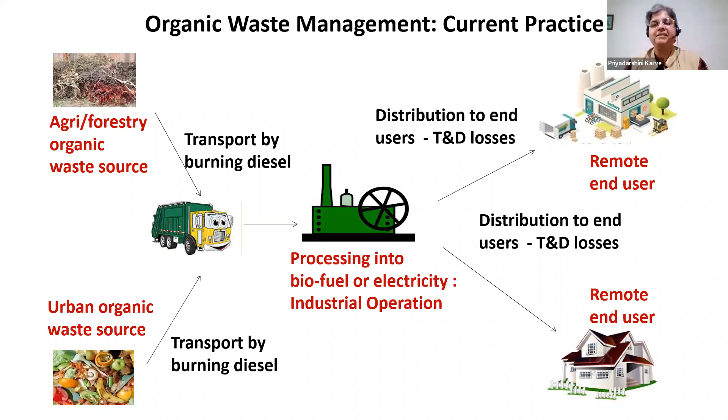So we have been promoting what we call micro scale or extremely decentralized processing, because even city level organic waste processing may be called decentralized, but what we are talking about is extremely decentralized as much as possible. Whatever organic waste is generated at a particular location, convert that into a usable or sellable product at that location itself, with minimum transportation of this material, which is a high volume, low weight kind of material. That is why a lot of energy gets spent for very little energy coming out.

The end users would also then be the community which is in a way generating this waste.

If these are the kind of systems that are set up, which could be at a single household level, an institutional level, or a gated community level, the maximum scale should be at a municipal ward level. Waste should not travel beyond that. If that logic is followed, you can actually get an output that is more than the input.

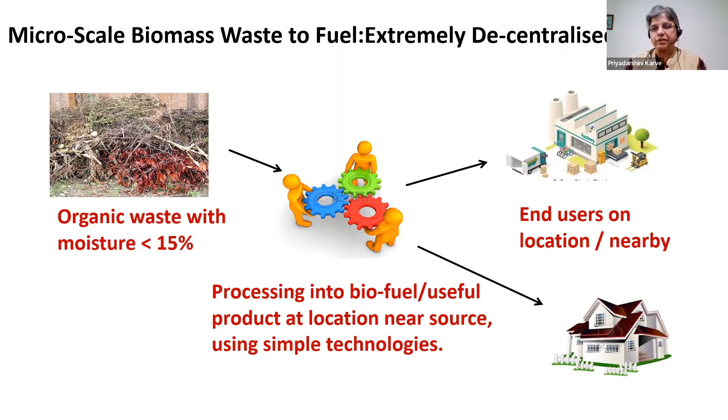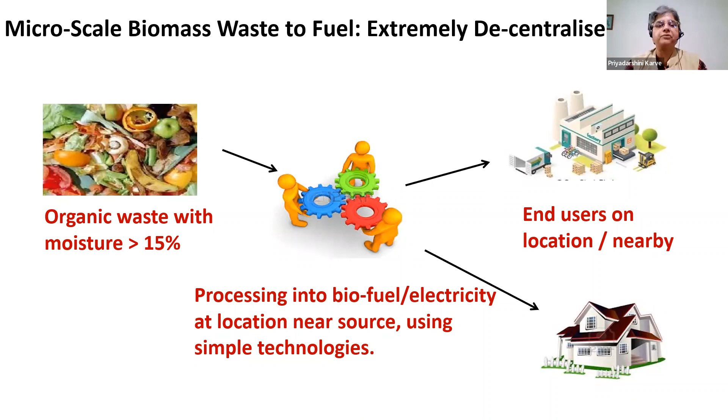Even organic waste has to be further classified, because different processes are used for waste with less than 15% moisture content versus more than 15%. A simple example: leaf litter from the garden is less than 15% moisture, while kitchen waste is more than 15%. So green organic waste, being high moisture, has to be processed differently from low moisture waste, which is typically brown and more lignin-containing. It is possible to do this in a highly decentralized way and actually extract more output than the input that is going in.

What are the technologies currently available? With biomass waste, organic waste, if we look at it from an energy perspective, we can get solid, liquid, or gaseous fuels. So replacements for all three types of petroleum fuels are possible from organic waste. But the financial economics as well as energy economics will work out if and only if this is done in a decentralized way. That's the key aspect to keep in mind here.

For solid fuels, charcoaling is one of the most traditional technologies. Biomass briquetting and pelleting is also quite well known now. For gaseous fuels, wood gasification and biogas generation are things we are familiar with. Liquid fuels are not so popular in India, but in other developing countries, wood distillation and catalytic fractionation are used, more in India for converting or recovering petrol from plastic. But biomass, lignin particularly, is also a polymer—a natural plastic—and therefore the same process can also be used for extracting a liquid fuel from it. So this is also a possibility, but primarily solid and gaseous fuels are the technologies we are familiar with.

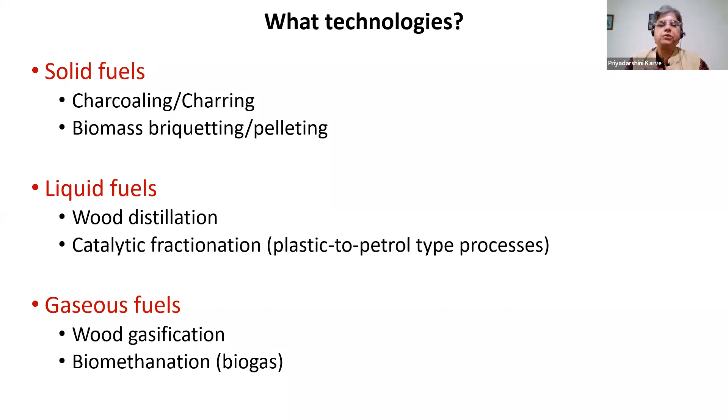I'm going to focus only on the first one, which is charcoaling or charring. What you see in the picture is the charring kiln that we have developed. As you can see, it is metallic—just metal plates connected by nuts and bolts. This makes it easy to dismantle and move from one location to another, and very easy to operate manually. This is a portable charring kiln, which we call the Samuchit Trashflasher.

In case of getting a fuel out of this, there are two ways of looking at it. If your feedstock is dry leaves, dry weeds, or dry grasses, you will get char powder. This needs to be mixed with a binder, and then you can use a very simple briquetting machine—available even as hand-operated machines—to make char briquettes. This can be entirely manual on a small scale, but on a slightly larger scale the machine can even be electricity driven, using multiple kilns. The idea is you convert the waste into char where it is available, then transport the char to the briquetting facility. If your feedstock is woody—wood waste, bamboo waste, or coconut shells—this type of material gives you charcoal equivalent lumps, which can be directly used as fuel without any further processing.

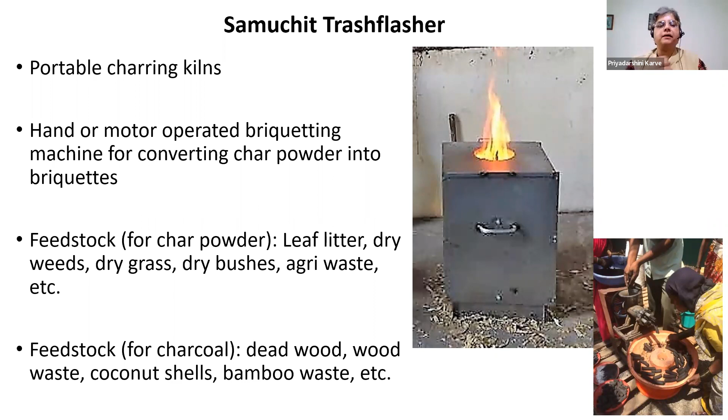This is a larger system which we designed because this has sort of come full circle now. In 2002, when I was first working on this technology, our thinking was that this is for rural areas; I was at that time working with an NGO located in a sugarcane growing area. So the idea was sugarcane trash, which is the dry leaves of cane which are left in the field when the cane is harvested. I'm not talking about bagasse here, I'm talking about the waste that is left in the farm, which the farmers just burn off. So our idea was that instead of burning it off, they'll make char, and this will be a new product. It didn't happen for a variety of reasons, but we started getting demand from cities for garden waste management, and therefore we scaled down our technology so that it can be manually operated, etc.

But now, because there is a lot of interest in biochar from the agricultural community, we also realize that even at a ward level or at a city level, people may be doing waste management very efficiently, but they end up with a lot of woody waste from time to time. Trees are being cut for road widening, for building construction, and so on. Also, bamboo waste and old furniture waste are being generated. So this is getting piled up at the waste management facility because composting doesn't work for these materials. So we now have this larger kiln. There is a person standing there, so you will get a sense of the size.

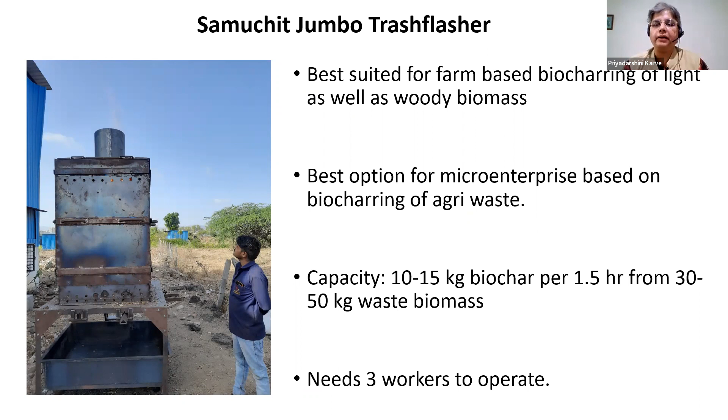One can use the gas also, but that will just keep on adding more complexity and more cost to the system. This system also is portable in the sense that one can dismantle this into 4 or 5 pieces, which can be loaded onto a three-wheeler tempo. And the idea is wherever a large quantity of woody waste or even agricultural waste is being generated, you put it up there, deal with that waste, and then shift it to another location. Minimize the transportation of waste. That is the key here for ensuring that the cost remains low.

Once you have charcoal as fuel, there are multiple ways of using it. We are already familiar with many of these. We ourselves have designed this steam cooker in which you can use only about 100 to 120 grams of charcoal or char briquettes and cook dal, rice, vegetables, 3 items at a time for a family of 4 to 5 people. So from our website, you can go to our YouTube channel and you can see the video of how this cooker operates.

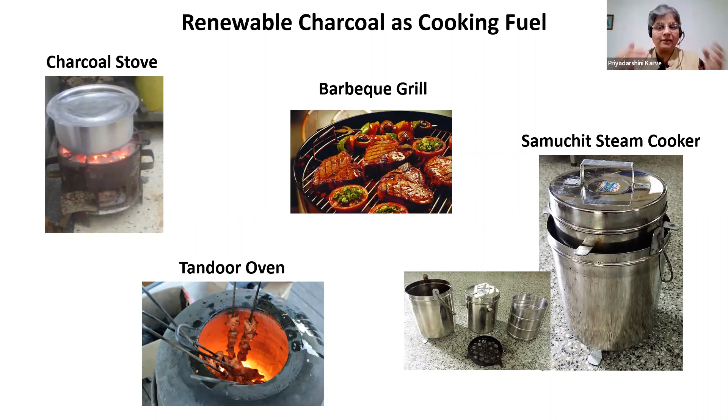So the ideal situation is if you have some backyard where some waste is being generated, convert that into char, make char briquettes out of it, use those briquettes for your own cooking, at least partially, because all the boiling and steaming can be done in this cooker. So you are using a renewable fuel rather than LPG or piped natural gas.

But that's not all. This char that we are producing from waste, when it is used in non-fuel applications, is typically called biochar. Adding biochar to soil will improve soil health, and you can mix it with compost, and you can also mix it with chemical fertilizer if that is what you are using. It will reduce the amount of fertilizer going in, and still you will get the same yield. Biochar also holds moisture in the soil, and therefore it in general improves the soil health, reduces the water requirement, and in many cases people have reported getting higher yields from biochar applications. And that is in fact one of the reasons why there is an interest now from the farming community.

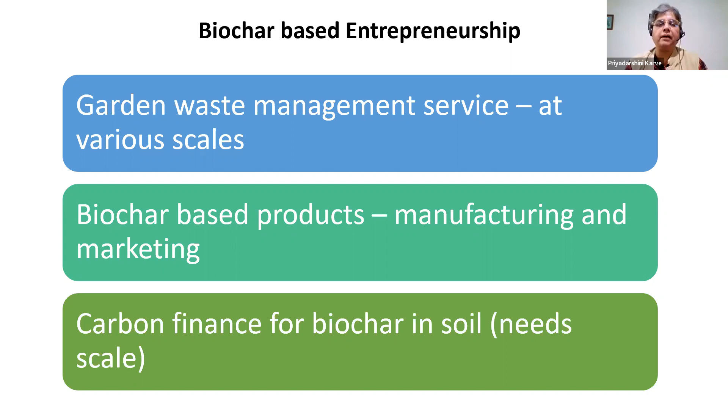So this is another important aspect, because if we really want to crack the climate crisis as well as the sustainability crisis, what needs to happen is all our business processes, our entrepreneurial processes should become environment friendly. Environment friendliness should become mainstreamed in entrepreneurial processes. So this type of new green entrepreneurial opportunities is the way to go, especially if people are looking for starting new enterprises. Those of you who are interested in creating some interesting startups, look at this sector where you can earn money by protecting environment. That's the way to move forward.